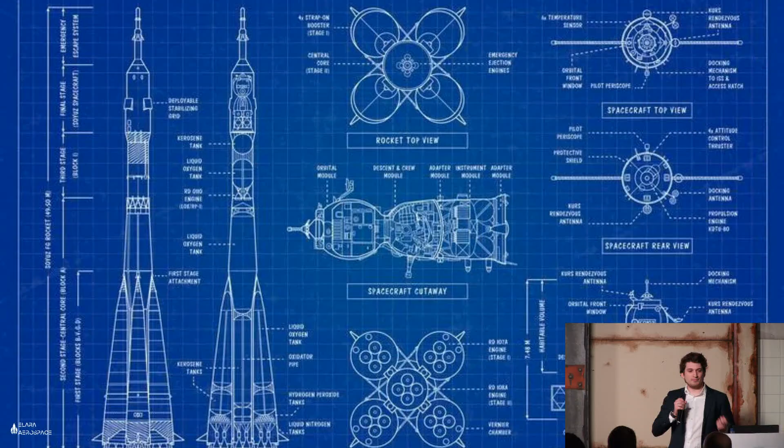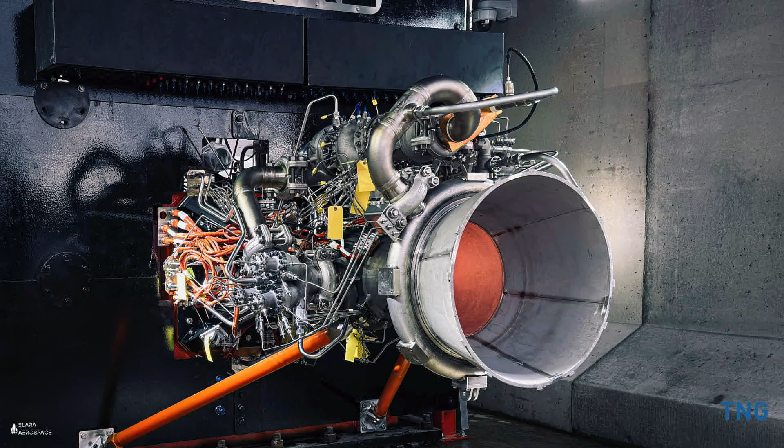You have blueprints that look like this from all over the world. This is now a Russian rocket, but it's the dream of probably every student of aerospace to understand how those work and what all the little parts do. And that's what fascinated me about aerospace and rocketry, especially trying to understand what all these pipes do in a rocket engine.

Technically, it's fuel and an oxidizer that you mix, combust, and that's it. But there's a lot more to it, and Adrian will probably answer a lot of those questions later, how we try and simplify that design so that we can actually do it in a lot less parts and simpler than what we see in front of you here.

For that, we need a great team. We have a team of around 20 students working on this project whilst also studying. We have 4 of us right here. We are kind of the core team behind it, and most of them I've met in a previous project called TUM Boring. We won the Elon Musk Not a Boring competition in 2023, and with our knowledge in TBMs and team building, we founded this project, Elara Aerospace.

Everyone has their unique skills, some more in the office, like Tobias Jäger, some more in the hardware, as Adrian Leutner, or me and Vincent going to events and collecting sponsors for our previous projects and the upcoming ones.

Why do we want to have another team here in Munich? We think it's very important for students breaking records. We've got the time, we have the resources, and with that we want to break world records around the world. There are hundreds of teams taking part in competitions, but we don't think that's the right place for us. We have our expertise in breaking records with our TBM reaching 11 millimeters a second of advancement speeds, which is something that no other team achieved during that competition.

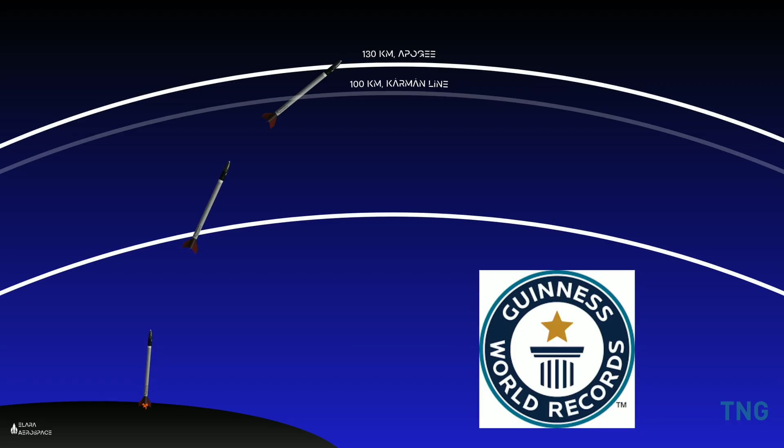What makes us different? We put a lot of effort into optimizing our design for additive manufacturing, so we try to use additive manufacturing wherever it's possible. We use the philosophy that Elon Musk presents at SpaceX and Tesla, which is the best part is no part. We'll also put a lot of focus on reusability.

The launch vehicle we're building doesn't only launch once, but multiple times. We already schedule a launch for a couple months after the first launch happens, so we'll have parallel development, similar to how SpaceX is building Starship right now in Boca Chica. For that, we will be recovering the first booster, maybe not the same scale, ours is just 10 meters long, but we will be towing it back with the Coast Guard to land and then refurbishing it and launching it again.

With the second flight, we already want to prove technologies such as relighting engines, not for landing, but just to demonstrate the technology and that we're able to do those kinds of things. So during our descent for the second flight, we will relight the engines, demonstrate the possibility of a student-built rocket engine doing that, and then let it glide to the ground with a parachute again.

All of that is with the goal of actually launching a rocket not once, but multiple times a year, with the goal of launching over one time a month, allowing students worldwide to launch payloads to suborbital space and test their technologies at a cost-effective point where they can afford it themselves. That's one of the biggest hurdles students have, they can't afford doing a rideshare mission with SpaceX unless it's government funded, and that's where we want to give them that possibility.

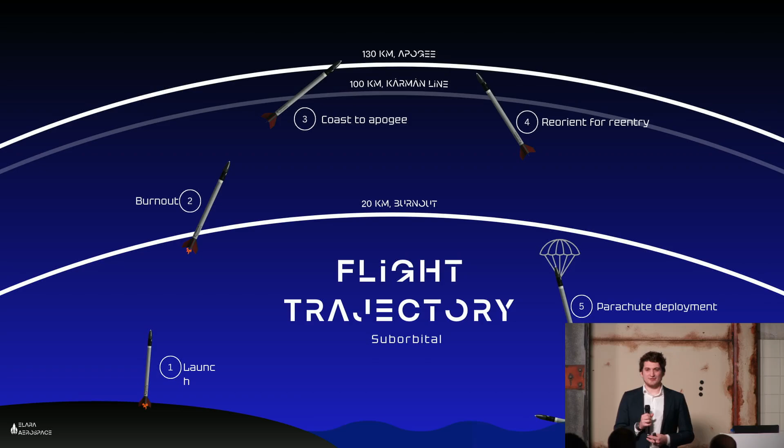The whole flight will start on Sardinia. We'll have our burnout at around 20 kilometers, coast to our 130 kilometer apogee, and then use our reaction control system to reorientate our rocket and get it ready for re-entry, where we'll deploy our parachute a couple kilometers above ground and then do a soft splashdown just off the coast of Sardinia, hopefully not on Italy. That would not be ideal.

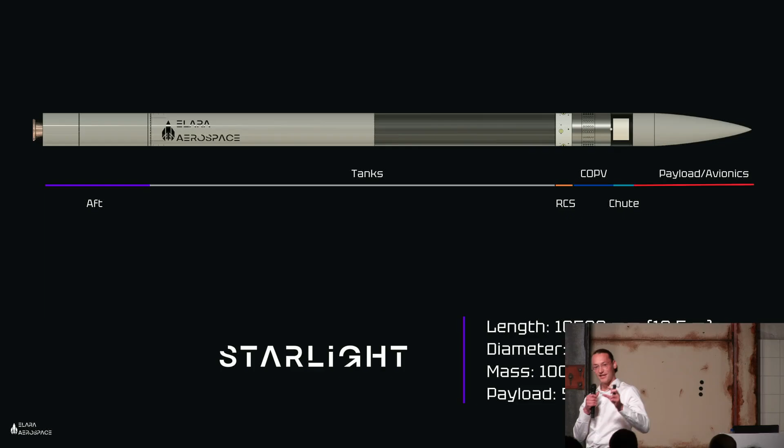Coming to the rocket: at the front, you see the payload and avionics bay, where we have a lot of electronics and whatever you want. Then we have our parachute bay, where the parachute will come out. Then we have a composite overwrapped pressure vessel, basically a helium tank, I'll explain it later. And then you see our reaction control system, RCS, which makes sure the rocket is really stable in flight, preventing it from turning around, and in the future it helps us do a self-propulsion landing, like Tom Luca mentioned.

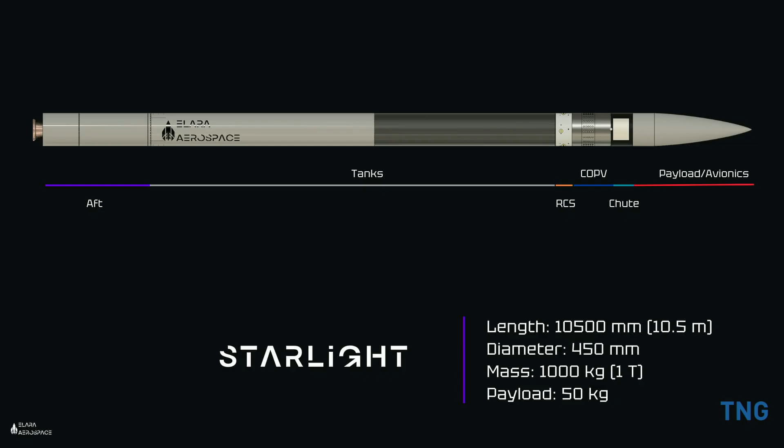Then we have the tanks, which make up quite a lot of the rocket, around 700 kilograms, so that makes out a lot. And then the heart of the rocket, the aft section, there we have the rocket engine. Here you see the rocket engine. If you're familiar with rocket engines, most of them are bell nozzles, and in this case, we are also using a bell nozzle.

There are some issues with rocket engines. If you don't cool them, they start to burn, and that's why you need very cold propellant. In our case, as Tom Luca mentioned, we are using liquid methane and liquid oxygen, and you can see it here at the bottom.

We push down the liquid oxygen at around minus 180 degrees, coming in with 120 bar of pressure inside. On the right side you see our regenerative cooling, cooling channels that swirl around, and inside it's around 3,500 degrees Kelvin. If we wouldn't have it, it would burn. Then at the top, both the propellant and the oxidizer come together and get injected.

What makes it possible to build it as a student team? First of all, it's actually technology, since we have the capability of using 3D printers. If you think back in the days, this was really, really hard to build a rocket engine. This is actually what makes it possible for us to do it in that time, and in general.

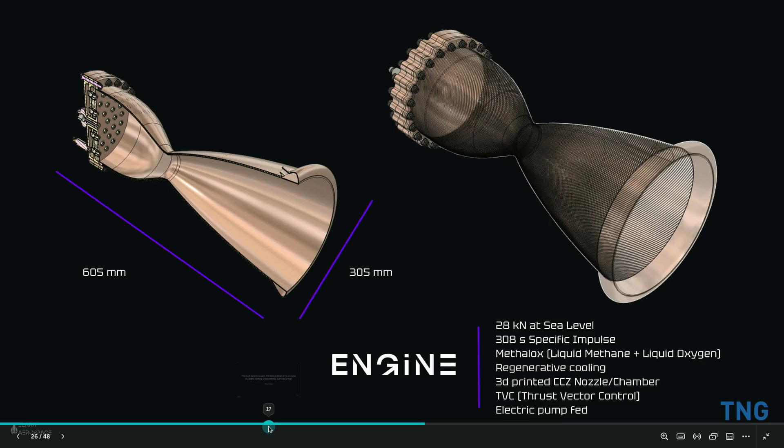As Tom Luca mentioned, it's electric pump fed, so the pressure we generate, meant to have around 50 bar in there, is coming from electric pumps. And I'll show you the injector plate right now.

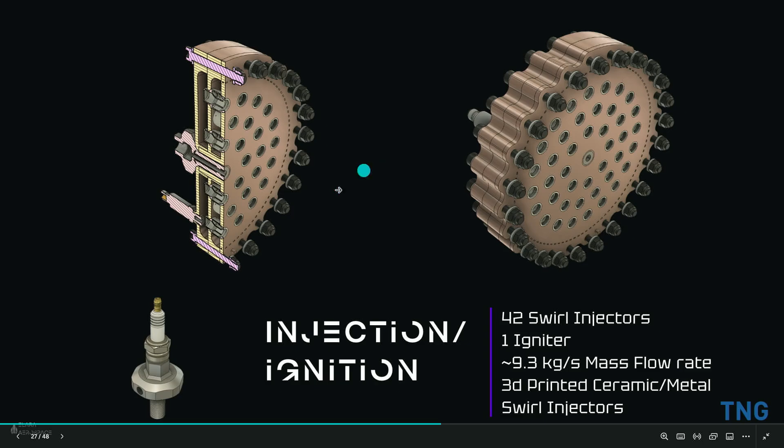So here it's just the part you saw in the front of the engine. We have 42 coaxial swirl injectors, so maybe you remember it from your garden. If you have a garden, you have water out there and you open the valve and it's spraying funny out. That's actually what those injectors are doing.

In the middle we have our ignition system, to be capable of reigniting the whole engine again, and that's a future thing. But first of all, you can think of it like a big lighter. And this is also 3D printed.

Here's a small look at our tanks, Toby will later talk about that. We decided to be very quick, and in terms of being quick, we need to simplify a lot of parts. First we thought, hey, we do everything out of carbon, but there's a lot of stuff which is hard to make tight and so on.

In order to achieve the rocket start in 1 year, we decided on really simplifying it, so we are using Type 1 tanks, meaning a metal tank, nothing special like you normally know. On the right side you see the composite overwrapped pressure vessel, the helium tank. We need this tank to make sure the tanks with LNG and oxygen don't implode, because when we start the engine and all the propellant flows out, normally they would implode if we wouldn't fill it. This makes sure we maintain 7 bar of pressure inside, so everything works out.

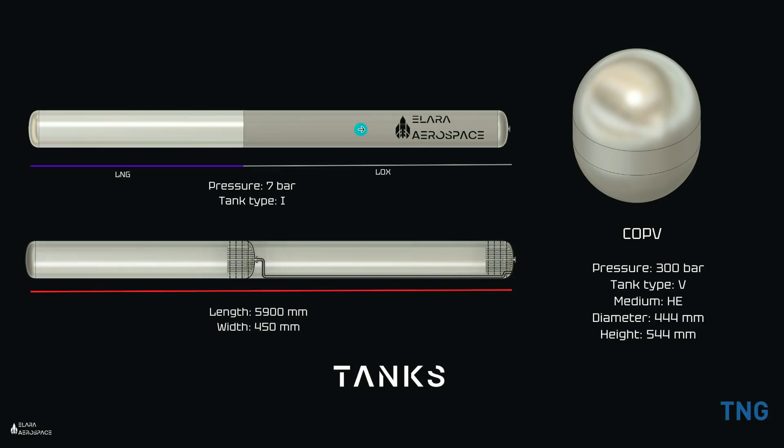In general, the question arises, how are we doing it? How do we do it as students? We want to build a rocket, that's for sure. And what do you need to build a rocket? You need rocket engineers. But since most of our students never built a rocket, how to do it? I'll explain it to you now.

What we are doing is getting a lot of advice from experts. We have a lot of partners, some of them Vincent will explain later. Some give us money, some give us software, but what is very important for me as a technical person is external advice, for example having advice from professors with knowledge in injection or turbopumps. We have a cooperation with a Swiss company that builds turbopumps, and they help us.

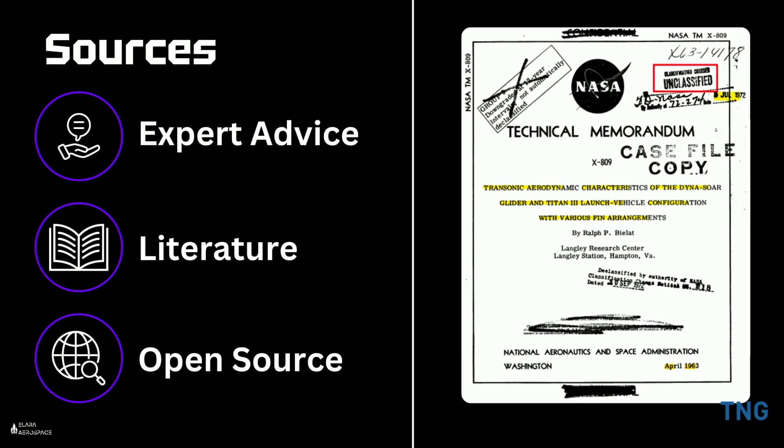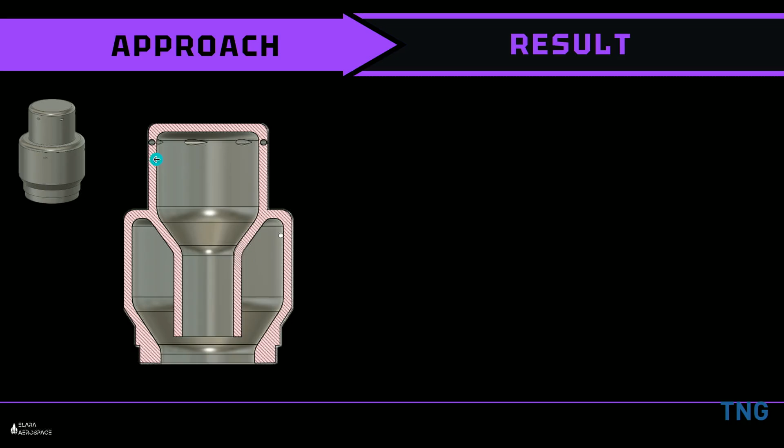On the other side, there are some open source projects where we also find our stuff. I'll show you now a little example of external advice. Here you can see one of our injectors, this was really one of the first injector designs we had, the one you saw prior in the injector plate. To give a small explanation, you see here on the top, those small holes.

Here the LNG is flowing in and getting swirled because it's slightly open. You can see it here. On the lower section, the oxygen comes from the right side directly after it cooled the engine.

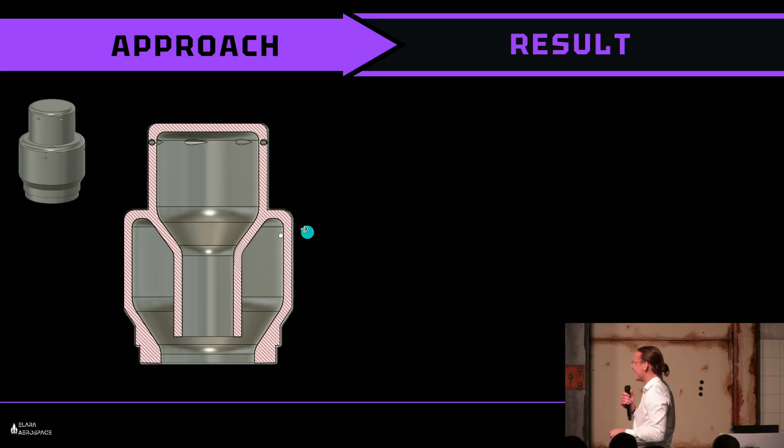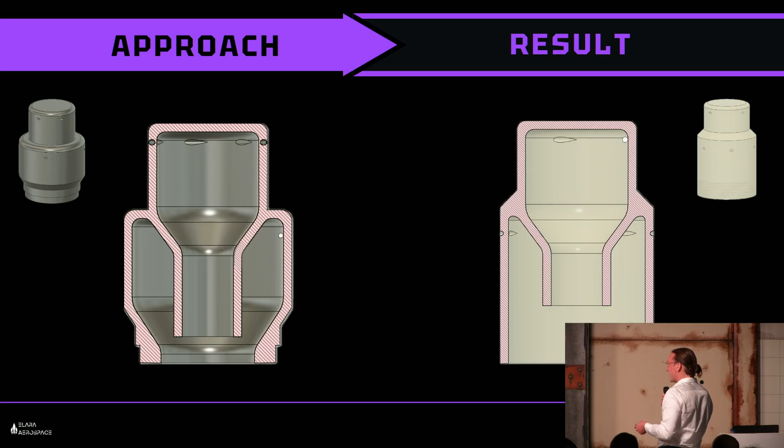So the idea was to do it like that, and then we showed it to a professor, and he said, 'Oh, I wouldn't do it like that. Please change it, it's not working, the parameters are too hard to maintain.' That's actually what he suggested. At the end, if you see it, in my view it looks very simple now, and it has a specific reason why he told us that. So I'll show you now.

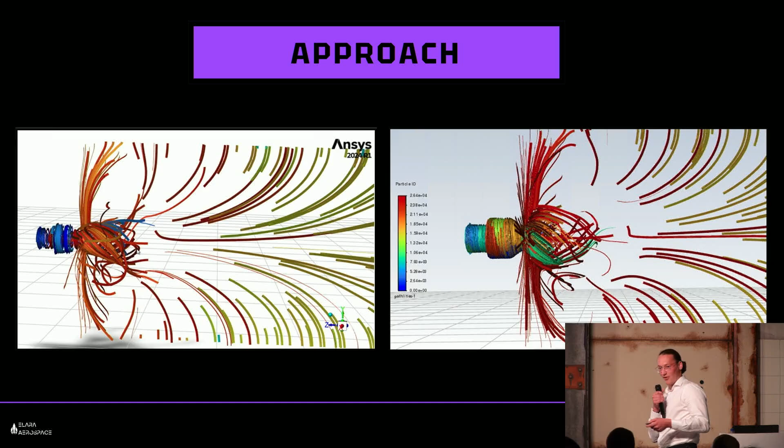So here you can see one of our results of the first simulation, simulating in ANSYS. And here I think the swirl gets a little bit clearer how it will behave. But at the beginning, the issue was also always the point where both fluids are colliding.

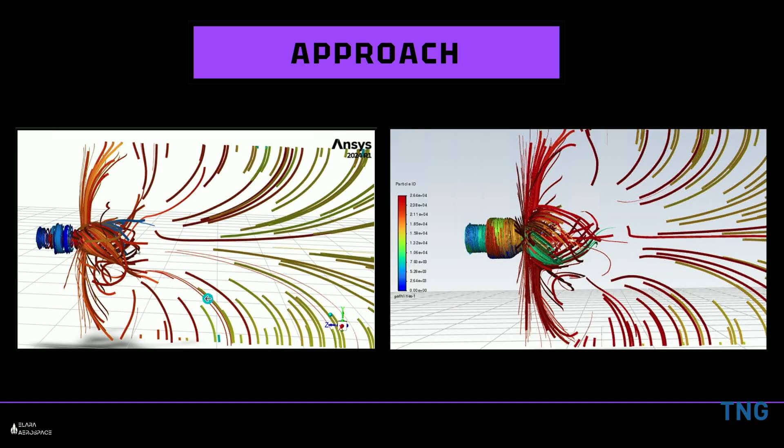So he told us, hey, you need to make sure that when LNG and the oxidizer are colliding, they should have the same velocity. So he recommended us the design I just showed you. And yeah, that was the result. It looks quite funny, I think.

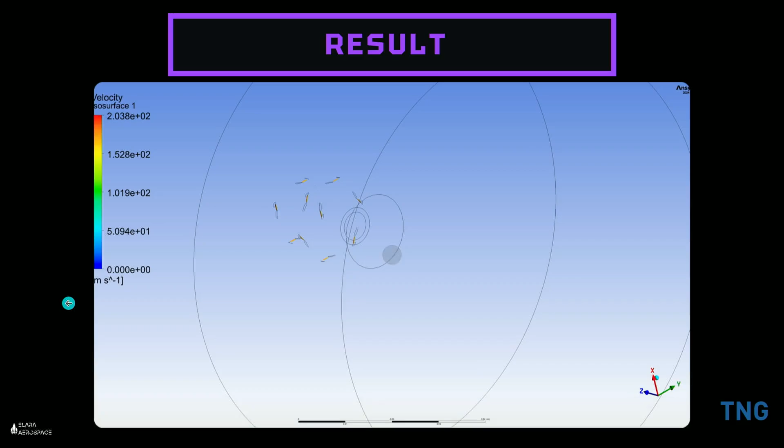Here you can see the inside, the LNG flowing through the holes, and then when it collides, it's coming very close. So we still have some work to do to get it at the same point, that it happens at the same point. Yeah, that's just to give you a small overview of what we are doing right now in the tech team.

Adrian, the simulation looks good, but does this also work in the real world? Tobias, I don't know, what do you think? Oh man, you put me on the spot. That's crazy that you asked this.

I need this. So actually, we know from previous projects, and I'm sure you know it too, you've worked on any project where you started something in CAD and simulations. It looks amazing, it looks like everything works out. And then you do something in reality, and maybe it explodes, maybe something goes wrong. But I think this is something that has to happen because, well, you can only get real data on experimenting in the real world. A simulation always just goes this far.

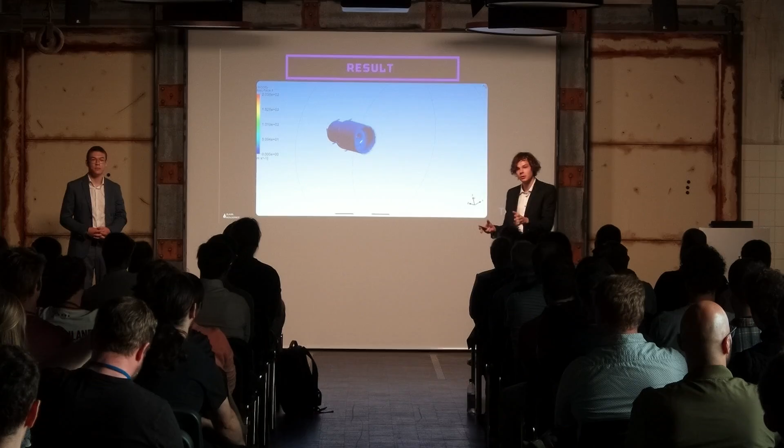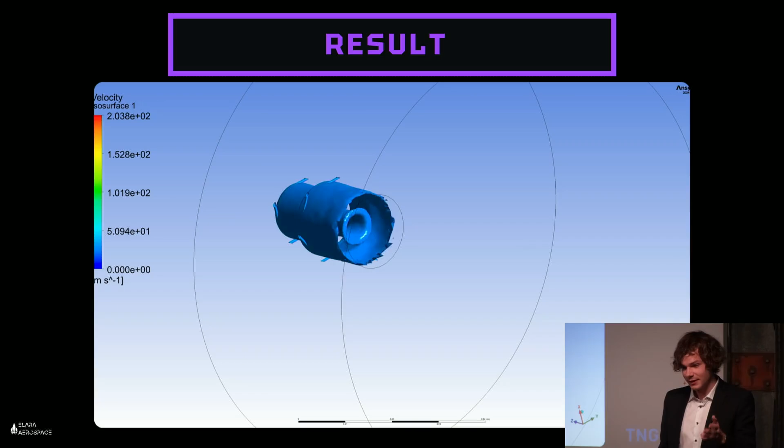And the same is also for risks. So when something goes wrong, it's a risk for parts, for capital, but most importantly, for humans. There's no way, once you harm someone, the project is basically done. So one of my jobs is to make sure that everything works well. So there's a topic of risk management. And the thing is, every useful technical system has a risk to it.

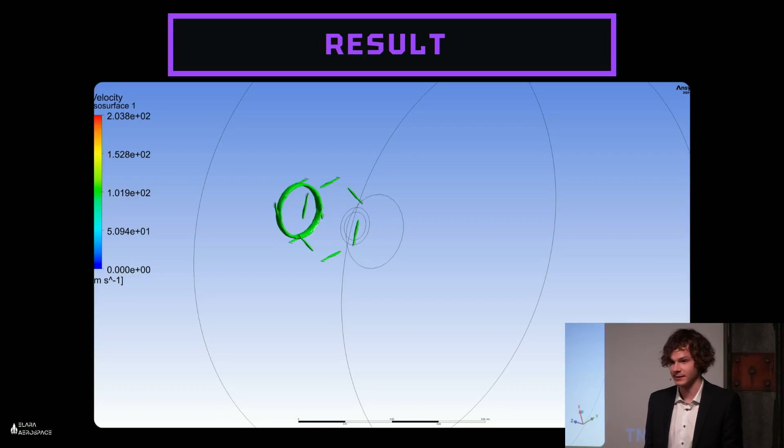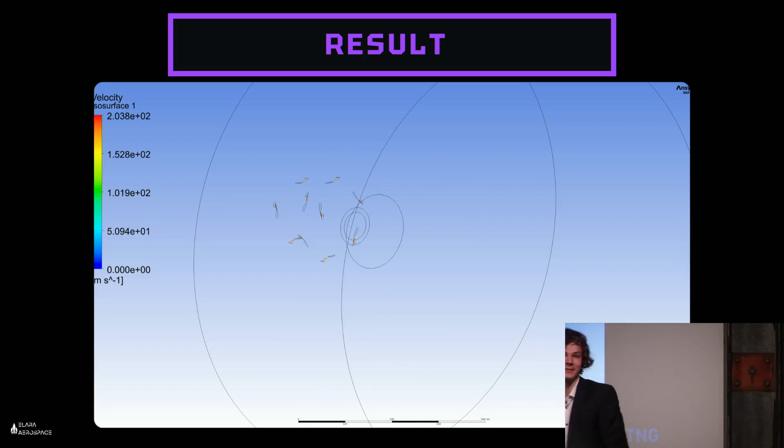Take any system, take your car, the car you maybe drove here with, the car you use on a daily basis. You can park it in a garage, then it probably won't kill someone, but the car wasn't built to stand in a garage. It was built to go around for mobility. So it's a matter of risk minimizing.

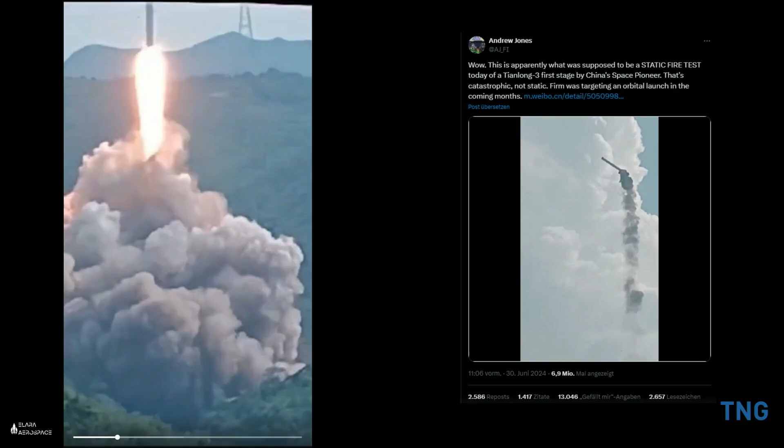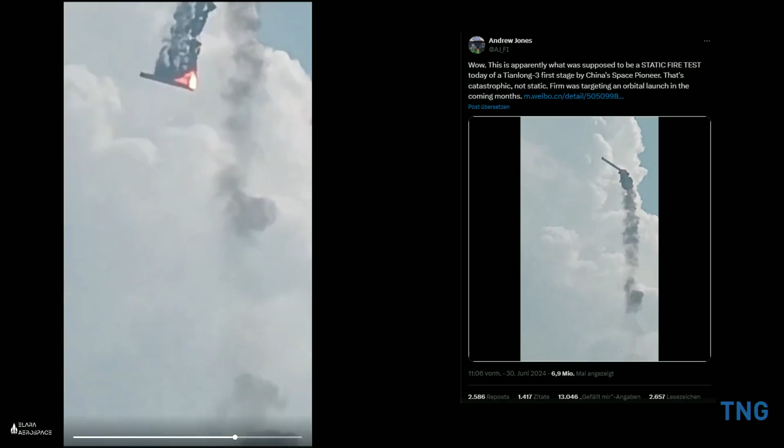And I want to show you an example where this didn't go too well, and it just happened 5 days ago in China. I have a video for you. Maybe some of you know this. This was supposed to be a static fire. For those of you that are not in the rocket industry, static fire, stationary, means you don't launch a rocket like it's happening here, but you just clamp it tight and fire it to test the engine, maybe the thrust.

So this just happened 5 days ago. It went quite viral, I think mainly on X. And it fell down very close to an inhabited area. So this is something that here would be totally unacceptable. We don't have things like this happen here. It would be a major disaster, be on every national news.

So the question for us, of course, is there are always risks, how to prevent it? Because we can't have things blowing up in Garching. I think Professor Hoffmann wouldn't be too happy about that. The buildings are all still quite new.

So we have quality management, also one of my fields of work that I do in the team, which means, well, are the parts that we manufacture like we said they're going to be in the simulation? We have material properties. If the simulation says, hey, this material needs to withstand 200 degrees, well, does it in reality also withstand that? This is one part. I hope so. I hope so too. We will have big problems if not.

Then we have a part of iterative validation, which I will explain to you just in a minute, of how we start, how to figure out how much fuel do we need, what is the size of the engine. We haven't built a rocket before, how to start it, how to get the first values. And at the end, I have another small piece about safety procedures.

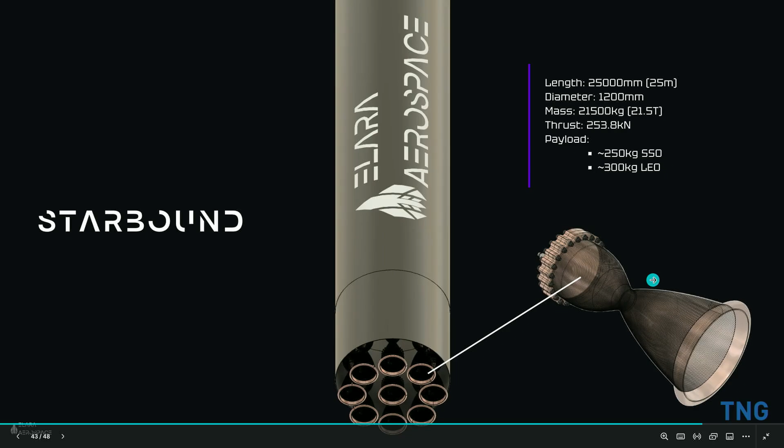What I like so much about this construct within Elara Aerospace is that the small rocket we are building right now sets the cornerstone for the bigger rocket we want to build a few years down the road. Take the rocket engine Adrian showed earlier as an example: it's the exact same engine we use in the smaller rocket. For the bigger rocket, it's the same, just multiplied by 9 times. So both projects rely on one another, because we take the learnings from the smaller rocket and use them in the bigger project, carrying the technology with us.

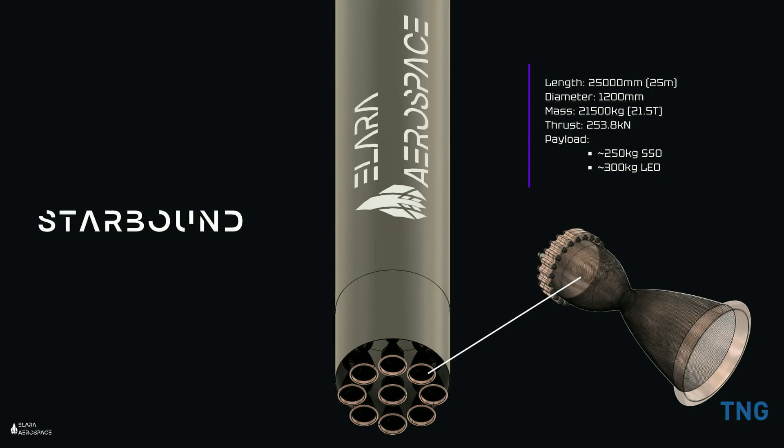With that rocket, we imagine flying to around low Earth orbit and taking about 300 kilograms of payload there. So there's a lot of room for some smaller microsatellites which we can put into space.

For all the sponsors, we want to create a win-win situation. What we can give in return is publicity: the logo on the rocket, the logo on the website, common social media posts, case studies we do together, but also some odd things you wouldn't think about at first.

I remember with Formlabs, we attended Formnext in November of last year, an additive manufacturing conference where we displayed 3D printed parts that Formlabs created for us, which further boosted publicity for both our project and theirs.

So in the end, we want to really create a win-win situation for all the partners and keep our sponsors happy. You might ask yourself, how do we get those sponsors?

That's a really good question, and there are mainly two ways: contacts and events.